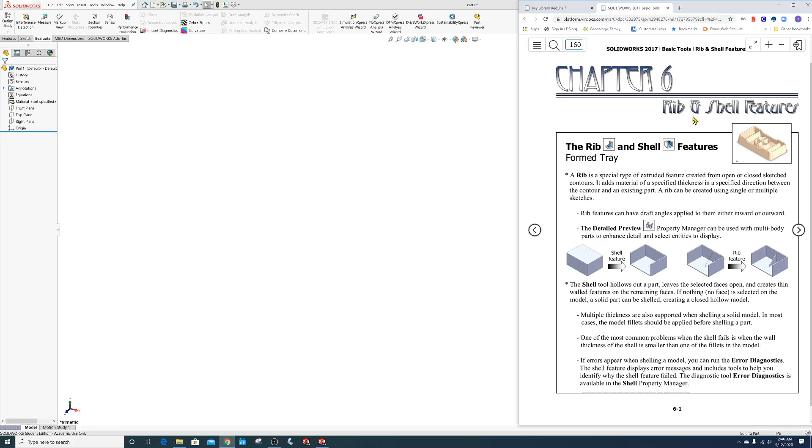So anyhow, let's get started. This particular one is... actually, no, that's not it. Just stay with me for a second. We'll get through rib and shell features, we've already done that one. Here we go, shell and mirror features is the actual one we're working on. Let's get started on that.

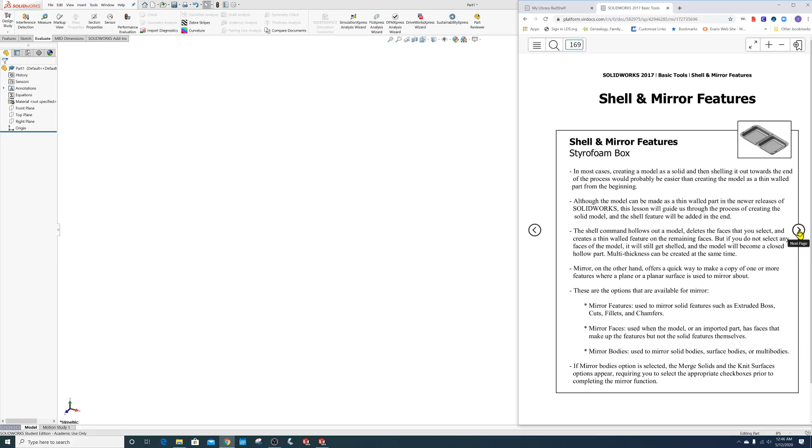We're going to make basically what's a styrofoam tray. I told you guys in the exercise to go ahead and use steel because I didn't want to confuse you guys, since I didn't think you could find styrofoam on the list. It's polystyrene, called PS something or another. Rather than confuse you guys when we're not in the classroom, I decided to let you make this in steel. So that's what we'll do.

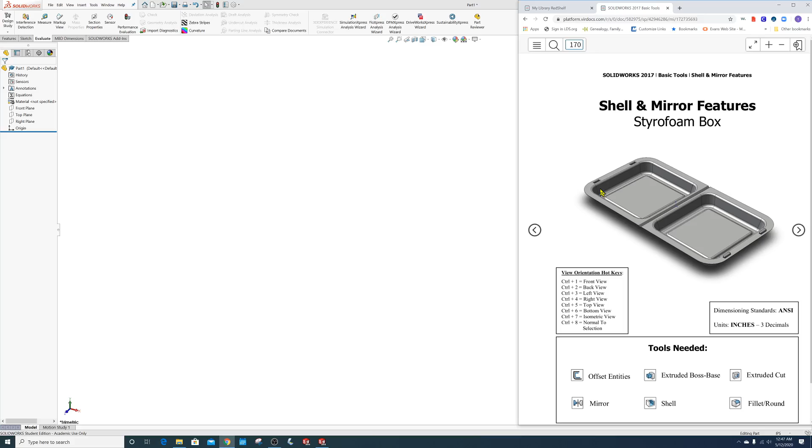But let's get started. We're going to start off by drawing a rectangle, and notice that the rectangle does not start on the origin. I always notice that kind of stuff. I also notice that we default to inches, but we need to have our decimal places set for 3. I'm going to check that really quick and make sure I'm set for 3 decimal places, and I am. So we're good to go.

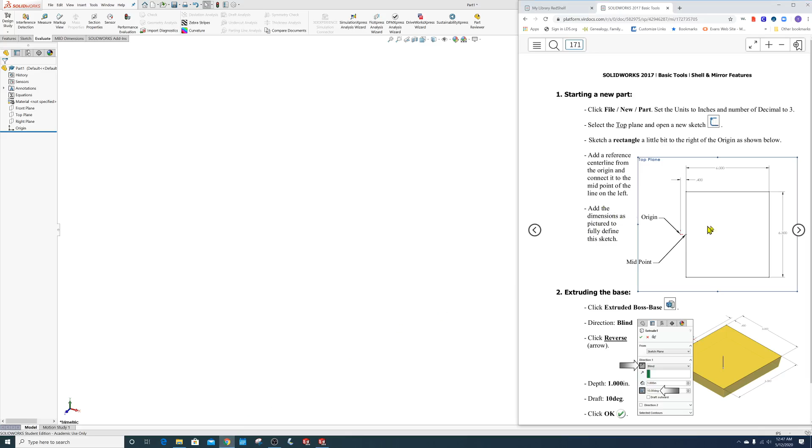I'm going to draw my rectangle at 6 by 6.30. I'm going to go on the top plane, start a new sketch, and then go ahead and do my rectangle. We got that, so we just need to add some dimensions. Let's take a look and see what those dimensions are supposed to be.

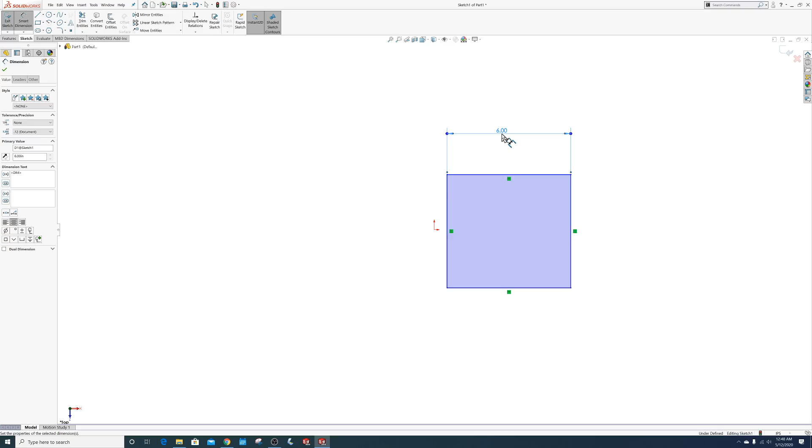6 across the top and 6.3 on the right. So I'll make that 6, and I'll make this 6.3. Then it has us do a dimension right here, so let's take a look — that's supposed to be 0.4. You can see there's a little short center line there that we're going to put in, and we see that this has to be collinear with the midpoint, so we'll do that as well.

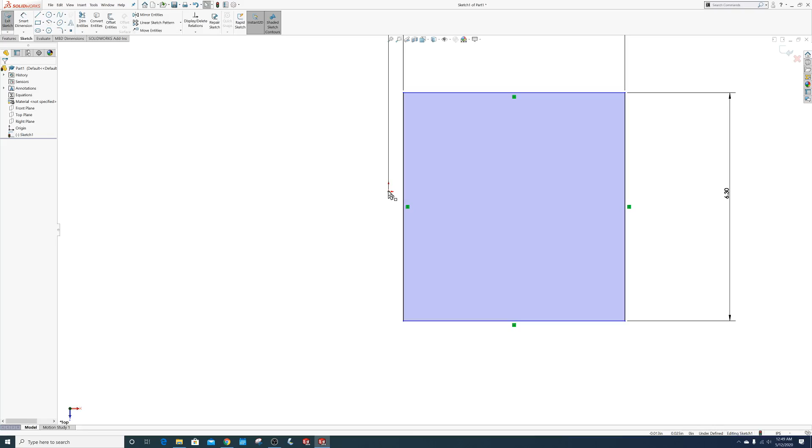So I'm going to go from here to here, and we're going to make that 0.4. Then I'm going to zoom in here and hit escape to get my arrow back. I'll click on that, hold down control, and find the midpoint — there it is, click there. And I'm going to make those horizontal. So now that is lined up.

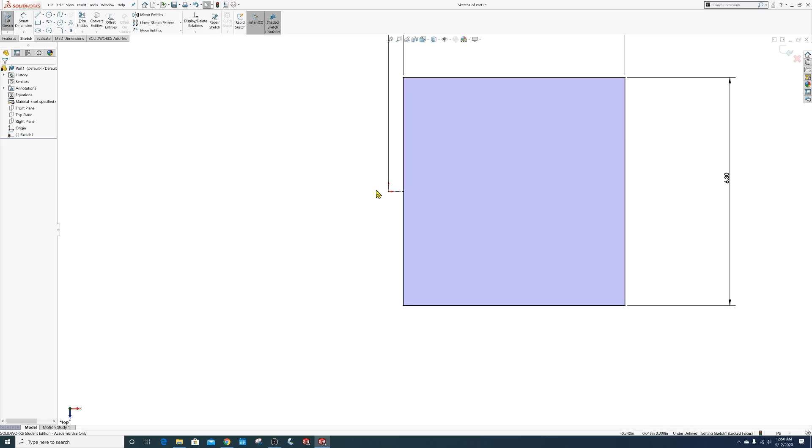And I am going to put a little center line there. I'm not quite sure why yet, but since it says to do it, I'm going to do it. So I've got my little center line there, and I'm going to turn off my features right now so they're not in the way. Okay, so we got that. Let's go back and see how thick we need to extrude this.

So we're going to extrude the base. Let's take a look here. We're going to extrude it, and we are also going to put what's called a draft.

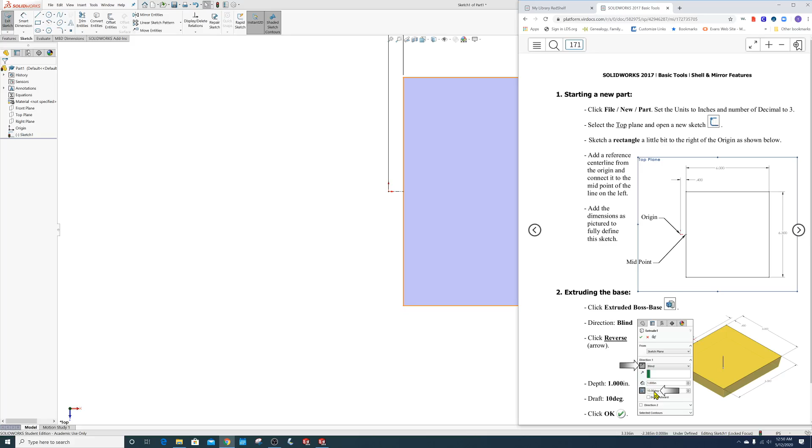We want to choose reverse so this extrudes down. The draft is going to be 10 degrees. So we'll go to features, extrude boss base, and notice it wants to come up. We want to reverse that, make it go down. We're going to click our draft, and then make that 10 degrees.

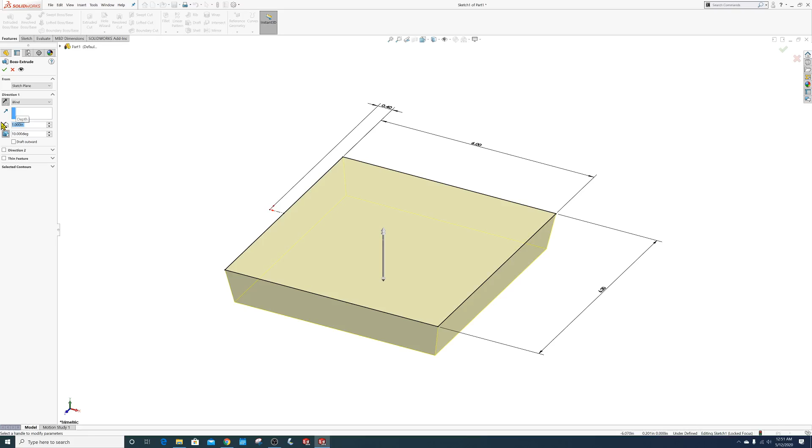See how that makes that kind of slope in? And I forgot how deep that's supposed to be, so let's check. We're going to do it 1 inch. I'll click right here, type in 1, and there we are.

So you can see how, if I do it like this, that draft made it slope in. They do that in engineering. If something's going to be injection molded and you want it to fall out of the mold easily, putting a little draft on it helps that a lot.

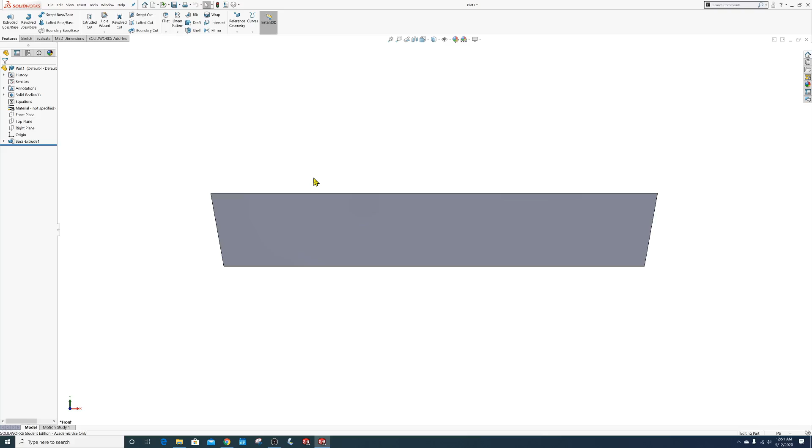So we'll get it back to where we are here and we'll go on to the next page. We're going to add some big 0.75 fillets, 4 of them. So let's go to fillet, and they are 0.75.

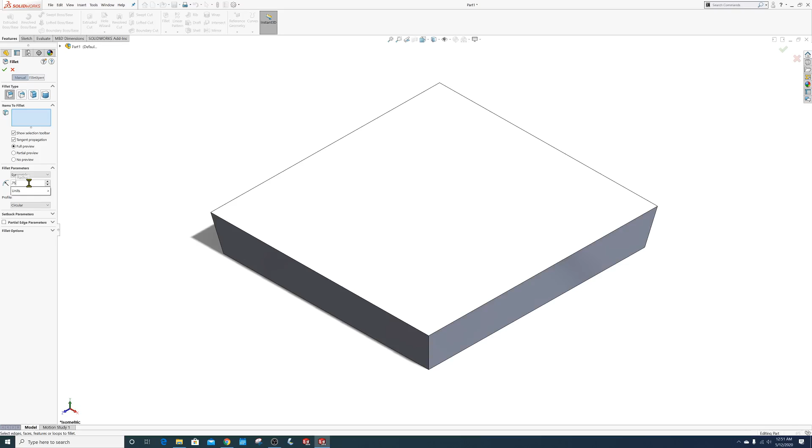I'm going to fillet here, here, and here. So there's our 0.75 fillets. Let's go back and take a look.

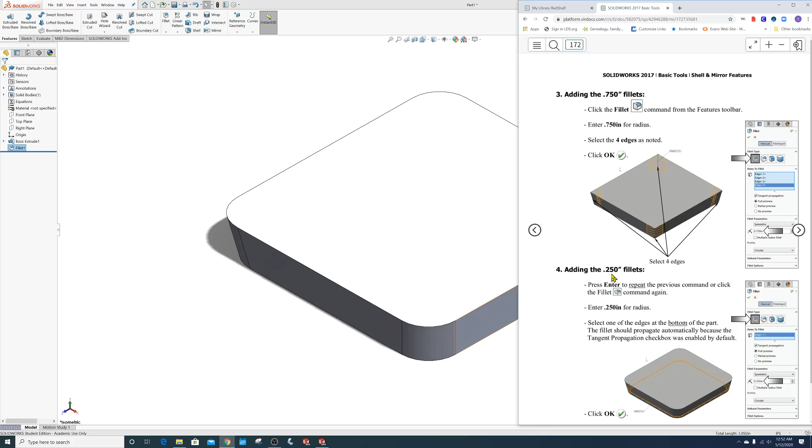And it looks like we have a fillet here on the bottom, and that's going to be a 0.25 fillet. So we'll go back here, go fillet, 0.25, and it's going to be right along the bottom. So there's going to be a bunch of clicking. Oh, it went all the way around because we had tangent propagation on. So we're good, we got that kind of rounded out like we're supposed to.

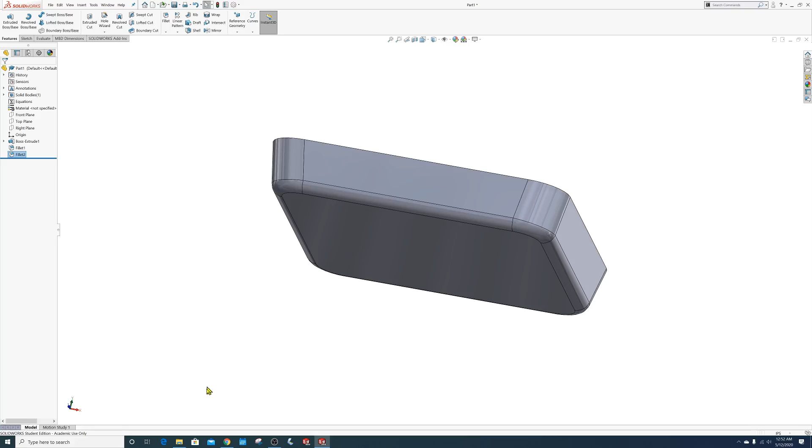So let's see what we do next, we'll go to the next page. Now we're going to do an offset sketch. So we're going to create a new sketch on the bottom. Let's click the bottom, new sketch, and then I'll just go ahead and make it normal. So we're looking at that.

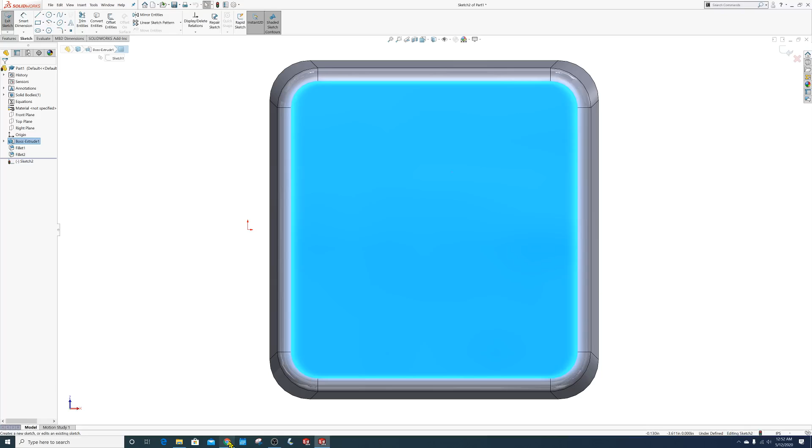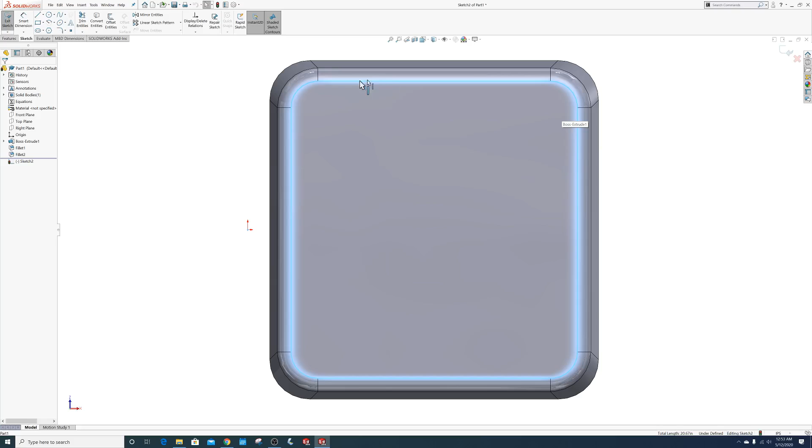Right click on one of the edges and select tangency. It looks like it's talking about right there. So I'm going to right click and select tangency, and that selected all of those. We could have held down control and selected them all one by one, but select tangency really made it faster for us.

The next thing we're going to do is select offset entities, and that did do an offset. But it looks like we want it to offset to the inside, so we're going to click reverse. It looks like our offset needs to be 0.4, so we'll click reverse and make that 0.4.

Let's see if there's anything else we need to do before we finish this up. So we did that, we got the reverse. Now we're going to extrude cut, go to a depth of 0.2, have a 10-degree draft, and clear the draft outward checkbox.

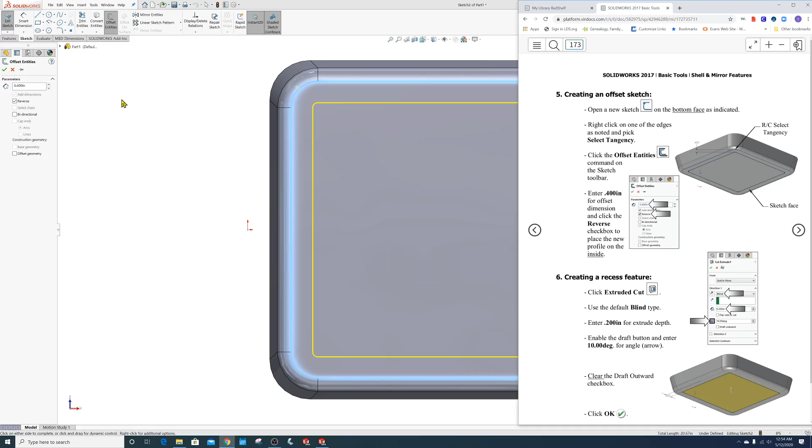So 0.2 is how deep we're going to go. We're going to go right here and finish the offset. Now go to features, extrude cut, and we want it to go .2, and let's check.

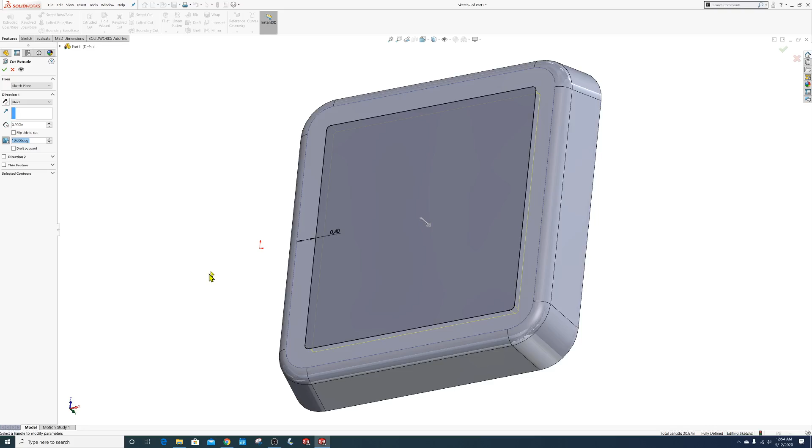So we're going to enable the draft again, it's going to be 10 degrees. The question is, which direction does it draft? Let's take a look. Well, we don't want the draft outward, so the draft outward is cleared. So we're good.

So we've got that little thing cut out there. Let's go to the next page. Looks like we have some 0.125 fillets. So we're going to go fillet. Was that 0.125? Yes.

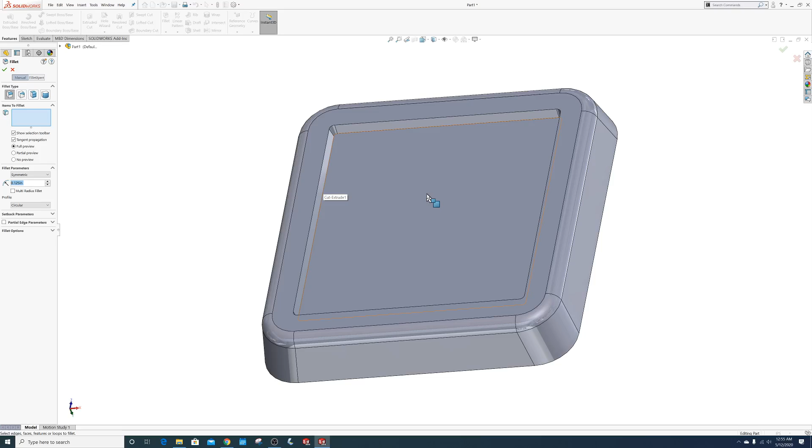0.125. Now it wants us to fillet all on the bottom here, and I could select all that one at a time, but if I select this surface, it automatically selects all of them. That's just a little trick you need to know. I think it says that in the book if you followed that right. So you can always just select the line, but if you select the surface, it's going to select all the edges that touch that surface. So we got that done.

Let's go here to the next one. Then we're going to go a 0.2 fillet, and that's going to be around the outside there. So we're going to go fillet, and it's going to be 0.2, and I'm going to select that right there. Tangent propagation's on, it goes all the way around, and there we are.

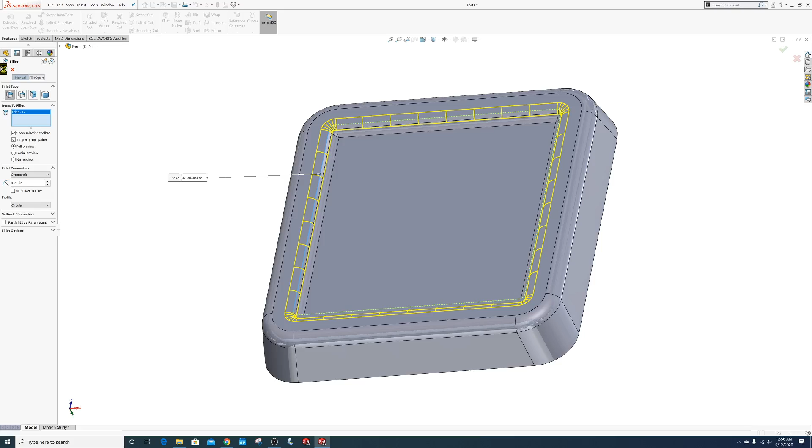Next page. Just checking real quick, make sure we're not missing anything.

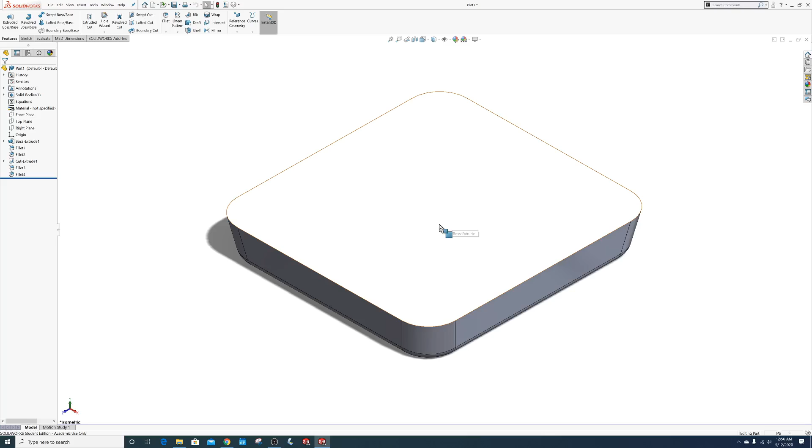Okay, we want to create the rim feature. So select the upper face of the part. Let's start by doing that. I'm going to turn this back to an isometric view, selecting the upper face of the part and starting a sketch.

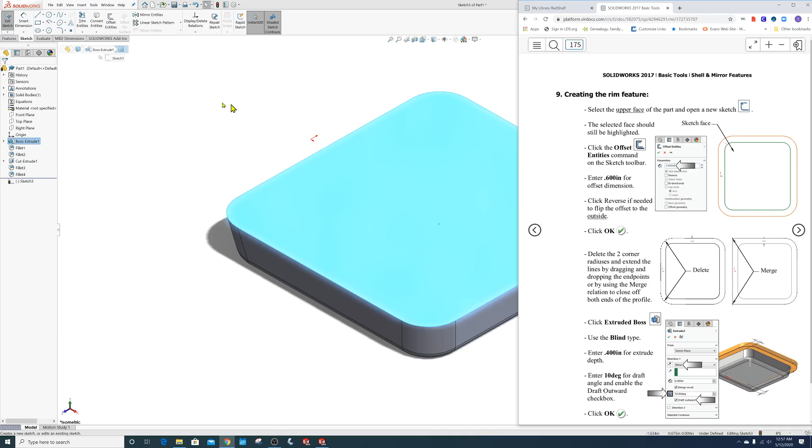It is highlighted. We're going to do offset entities, and 0.6 for the offset dimension. So offset entities and 0.6 is what we want. Let's make sure we're where we want to be here.

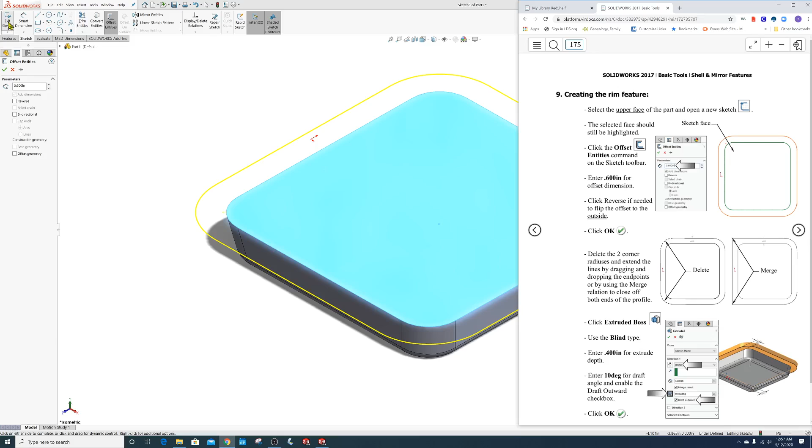We definitely want it to be right there. It says click reverse if needed. We don't need that, so we're good there. So we're good here.

I'm going to click normal to again, so we're looking at this correctly. Now we're going to go back to this, and it says to delete these two curves and drag the edges together, but we're going to leave it curved on the other end. So let's go ahead and do that.

I'm going to delete that curve. I'm going to delete that curve. I'm going to take this point here and drag it until it lines up right there. And then drag them till they're coincident. I'll drag this one down until it lines up just like that.

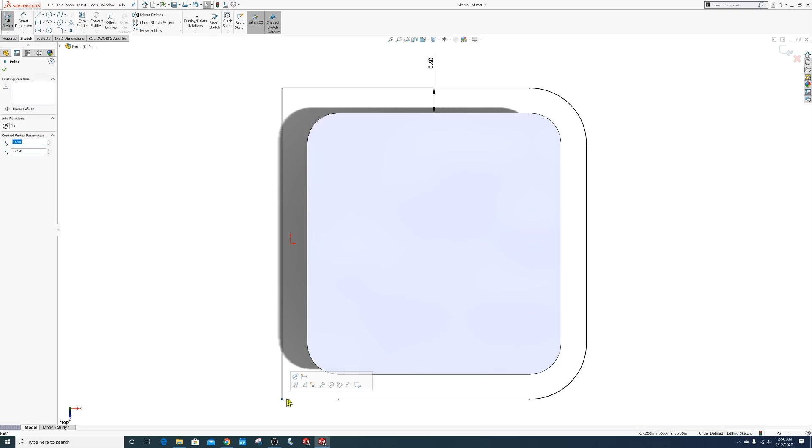Okay, we're still good, we're fully defined. Now it says we're going to click the Extrude Boss Base. Using the blind, we're going to enter 0.4 and draft it 10 degrees. And it looks like we want this to extrude up.

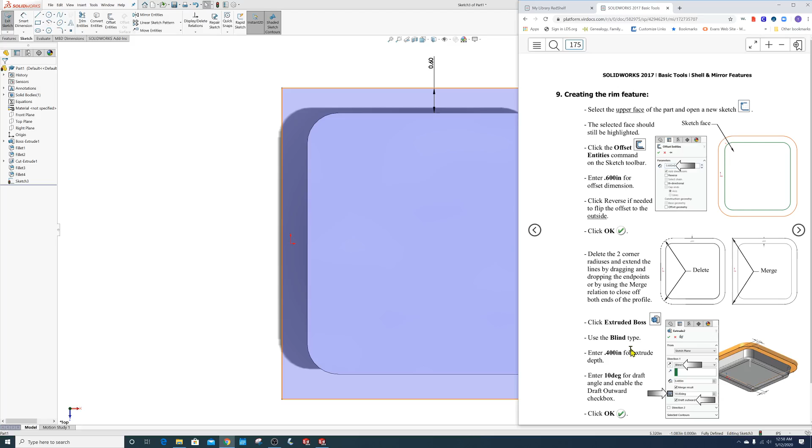So we're going to go to Features, Extrude Boss Base, 0.4, and that's looking good, it's extruding up. We want it to draft. And I don't remember...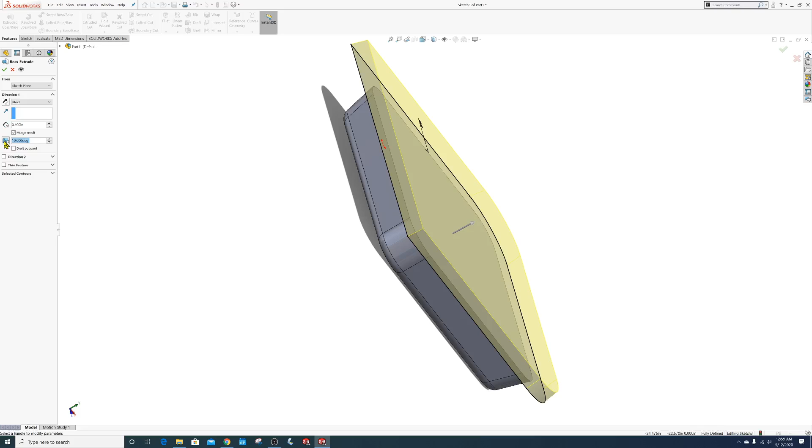10 degrees, we want it to draft outward. See, it's going inward right now, so I'm going to choose draft outward. And we're good to go.

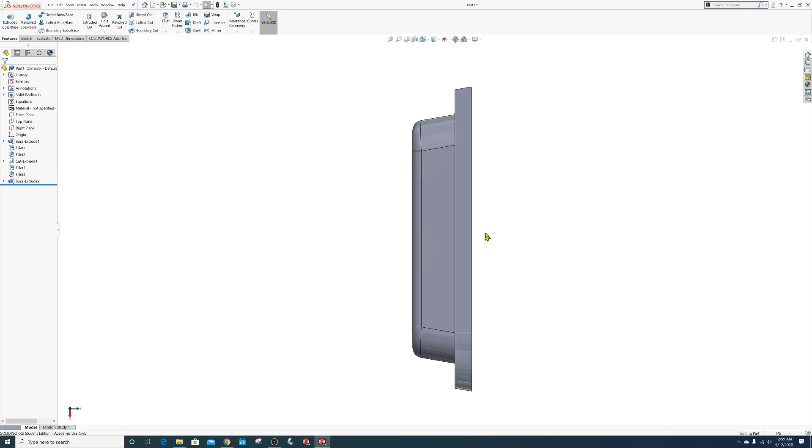Actually, what I want to do is this. So let's go to the next page.

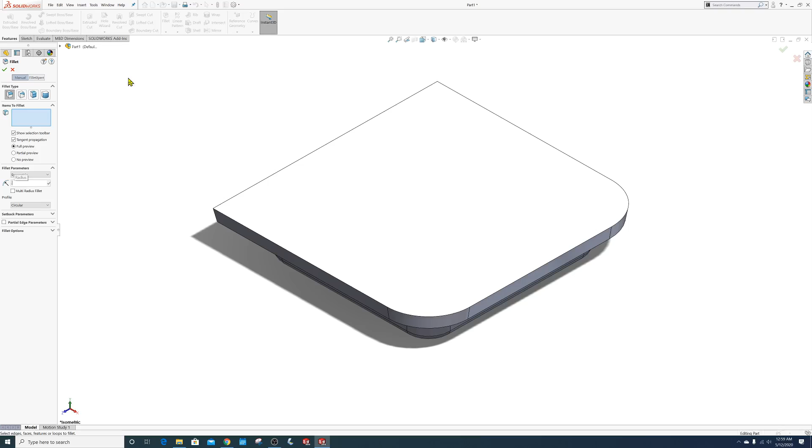Okay, we're going to add another 0.125 fillet, and you can see it goes right around there. So we're going to go fillet, 0.125, and it looks like we need to do it right around there.

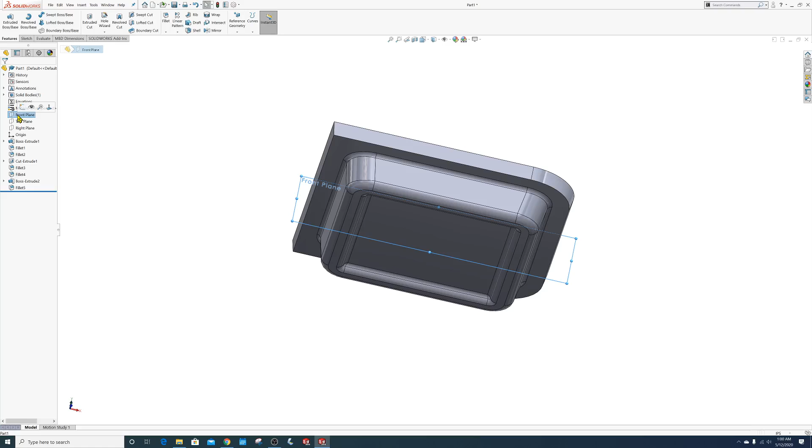So let's go, all right. So now we want to create the fold feature. Select the front plane, open a new sketch. So front plane, sketch, that's a sketch plane right dead in the middle there. No problem with that. I'm going to go Normal To.

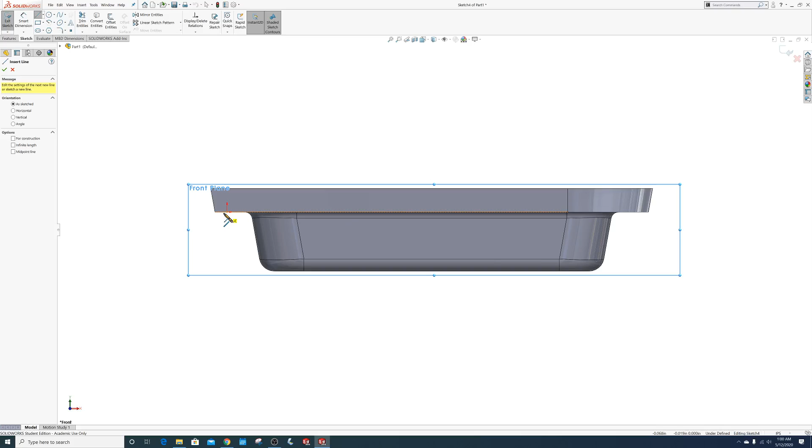And so now we want to draw a triangle which starts right there at the origin. So let's do that, and you guys know I don't really worry about dimensions at first. I'm just going to draw the triangle, coincident with there, go across there. So we've got our triangle now.

So now we're going to look at our dimensions. Looks like we want a 45-degree angle and a 0.118. So I'm going to go to dimension, and we're going to go 45 degrees.

Now you guys who didn't watch, I actually selected that line and that line, and then just 0.118. So I'm going from there to there and come straight down 0.118. And you can see we've got it there, and it is fully defined now.

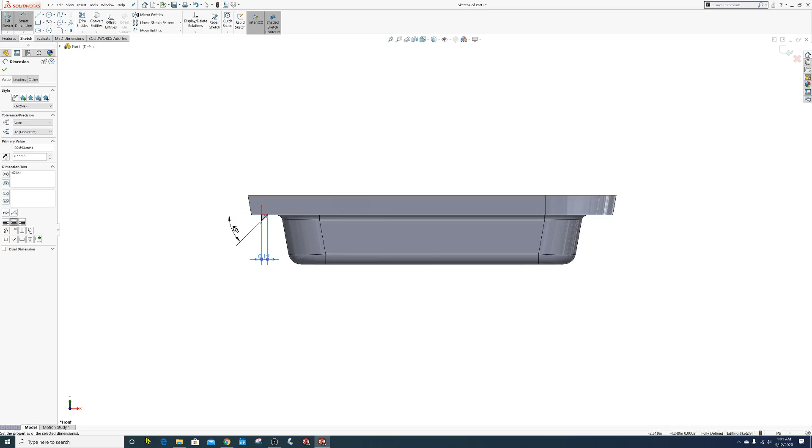So let's see what we need to do. We need to... let's go to the next page.

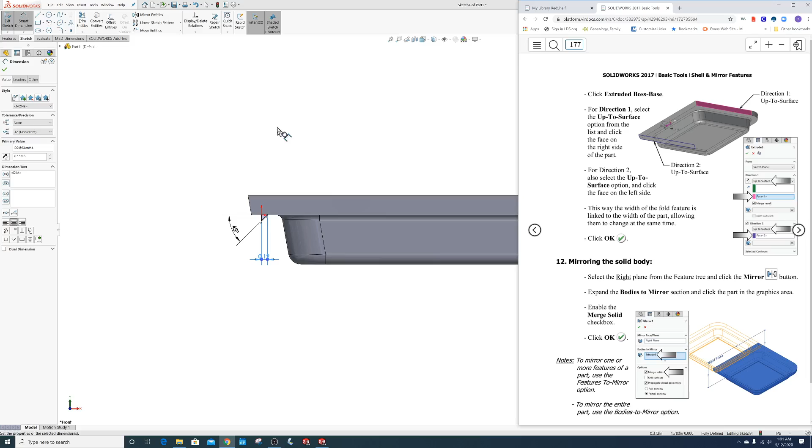So click Extruded Boss-Base for direction 1 up to surface, direction 2 up to surface. So we're going to go Extrude Boss Base, and we're going to select up to surface for direction 1. And that's the surface we want to choose.

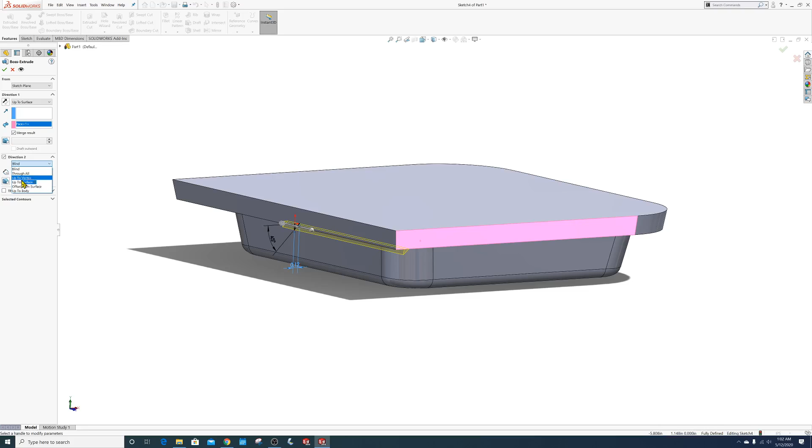And then for direction 2, we're going to choose up to surface and choose that one, that plane. And the interesting thing now that I've extruded that, you can see that since I chose up to that sloped surface, it actually follows that slope on both sides. So we're good.

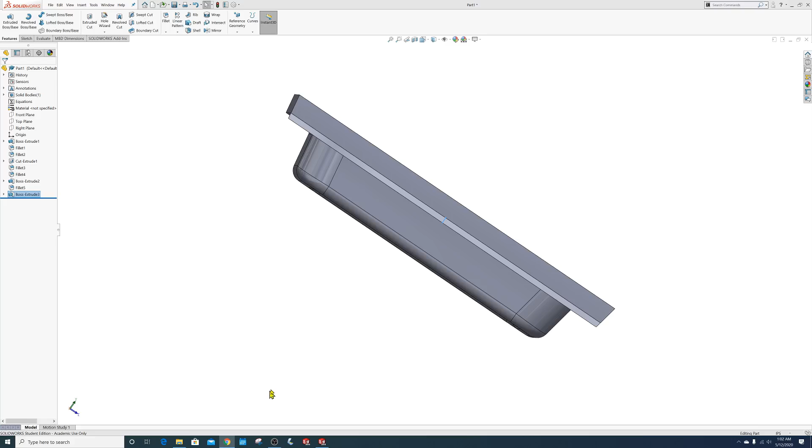All right, so we've got that. Now we want to mirror the solid body. Select the right plane from the feature tree and select the mirror button. So the right plane, and then we're going to select the mirror button. There it is.

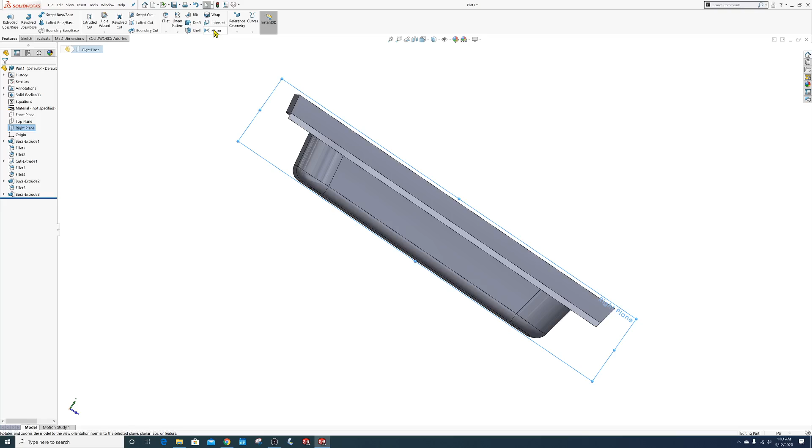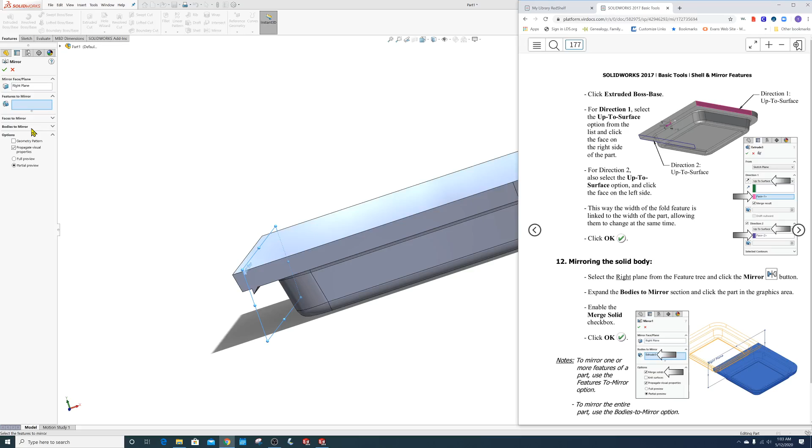You can see that the right plane is already selected as the mirror face. Now it says expand the bodies to mirror. You can choose features to mirror, but we're going to choose bodies to mirror. I can just choose anything over here because it's going to choose this entire body, and you can see that it automatically mirrors that. So we've got this whole thing mirrored out now. I can go isometric so you can see it all nice and the way it's supposed to be.

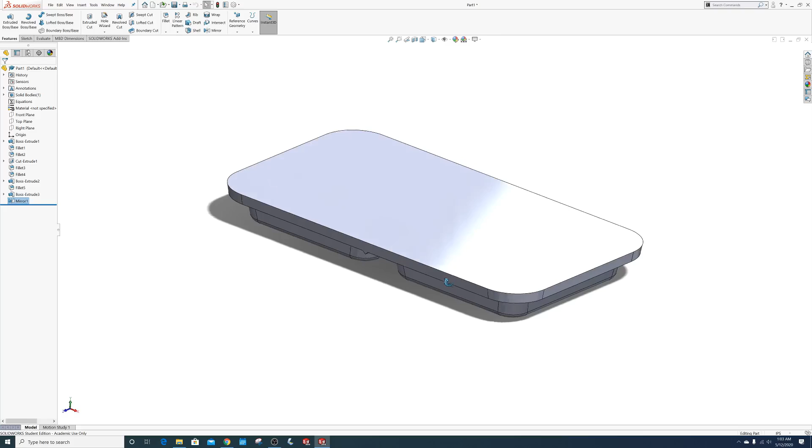Okay, so let's go on. So I chose that. It says notes to mirror one or more features of a part, use the features to mirror. To mirror the entire part, use the bodies to mirror option. So that's what we did.

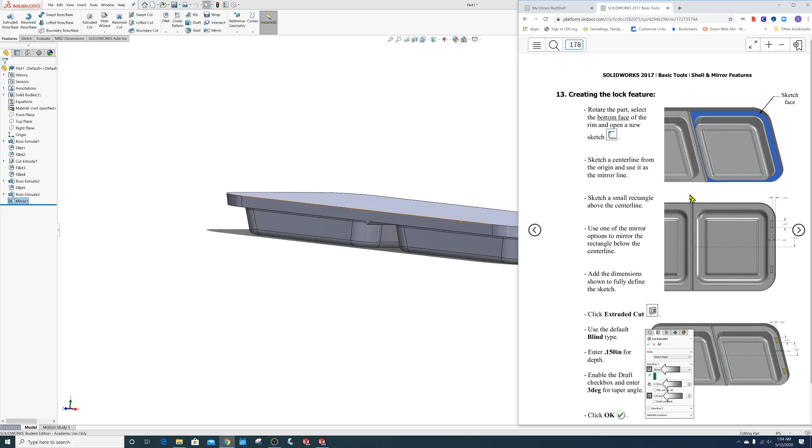Next we're going to create the lock feature. It wants us to go ahead, and I think it'd be easier if I actually make this smaller so we can see what we're supposed to do. So I'm going to select this face right here, start a sketch. I'm going to go normal to it.

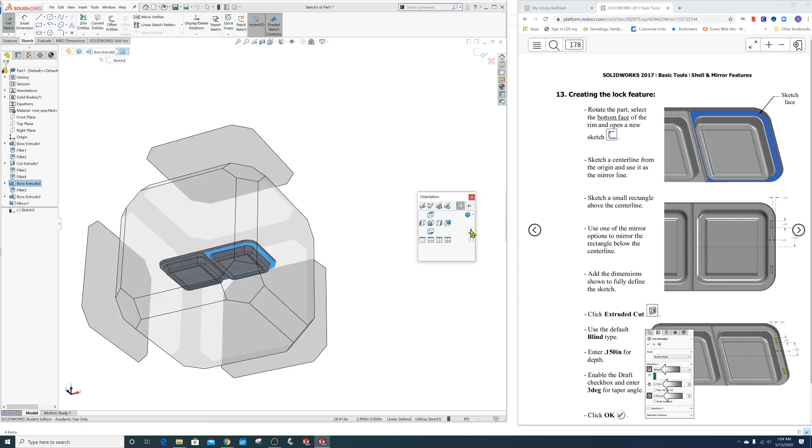Now it says sketch a center line from the origin and use it as the mirror line. So I'm going to select the center line from the origin, and we are going to use that as a mirror line. I just want to make sure that it's horizontal, and it is. All right.

So sketch a small rectangle above the center line. I'm going to my rectangle command and do a small rectangle. Then use one of the mirror options to mirror the rectangle to below the center line. So I can just go mirror entities and mirror about. And there it is. Because it's mirrored, it's automatically going to be symmetrical.

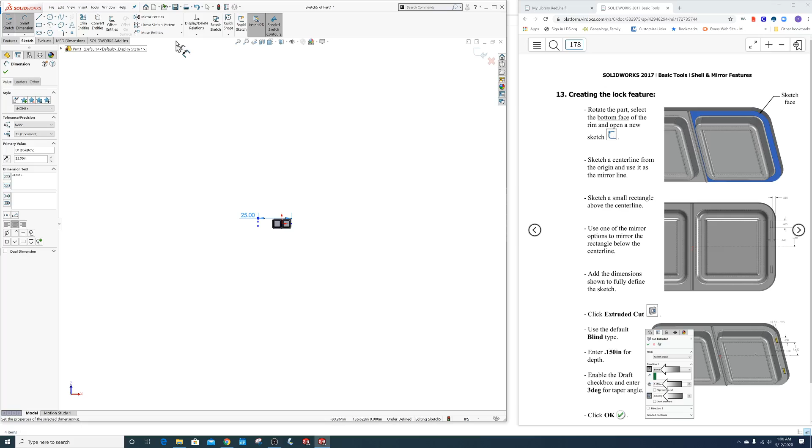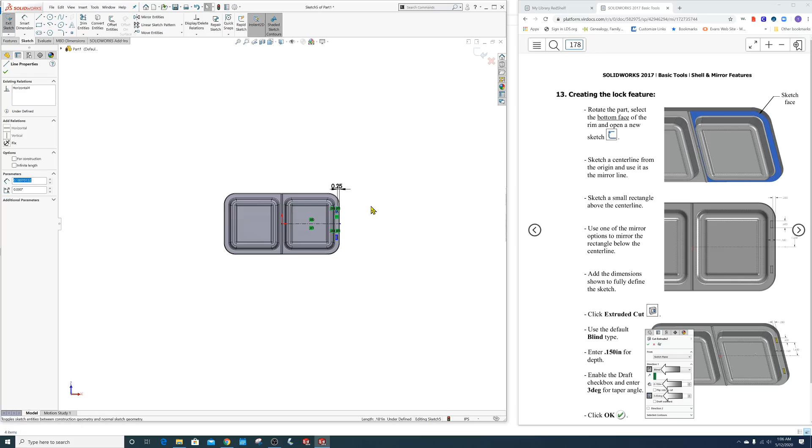Obviously I missed my decimal, so let's just undo that. See, it says 25 instead of 0.25. So let's try that again. 0.25, a little bit better. Then from here to here is 0.6. I'll go from there to there. Actually, it would be good if I get into dimension mode first and then go there. And that's 0.6. Then the bottom here, from here to the center line, is supposed to be 1.65.

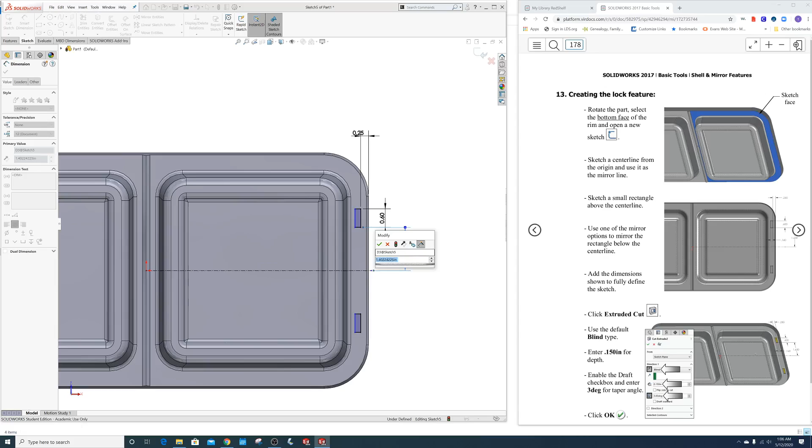So we're good there. And the overall thickness right here is going to be 0.16. You can see they're all there, they're all black now. I am fully defined.

So I'm going to go to extrude cut. I'm going to enter 0.15 for the depth. So extrude cut, 0.15 is the depth. And we're going to enable a 3-degree draft. So draft, and we're going to change that to 3. So we're good.

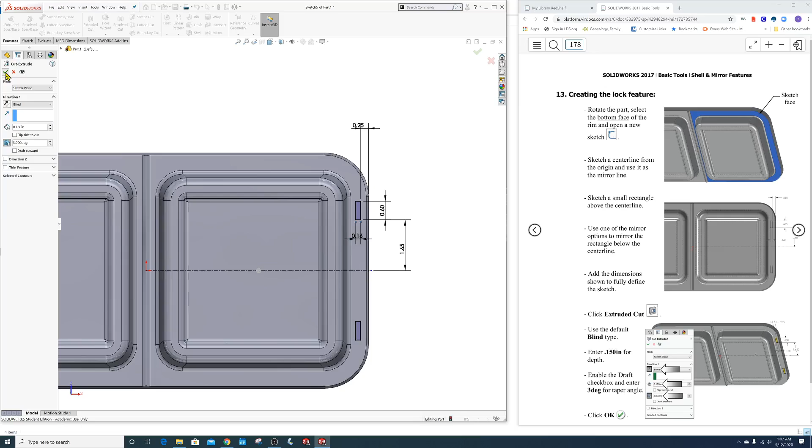And if you kind of zoom in there and I revolve this, you can see that it did do what it was supposed to do. So let's go to the next page.

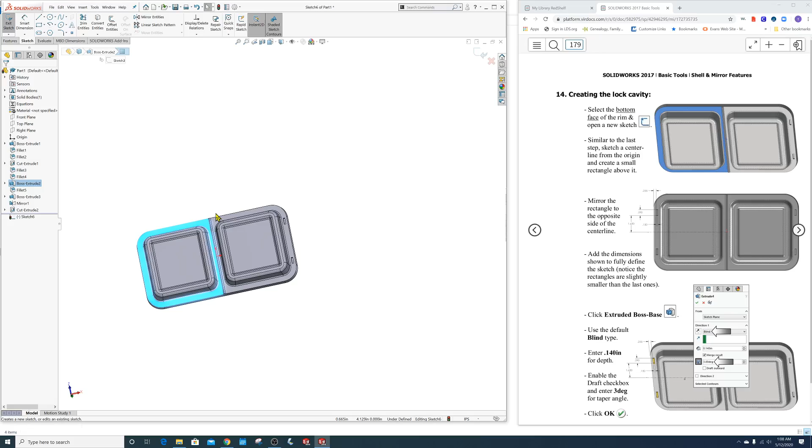Now we're going to create the lock cavity. So now we're going to select over here and start a sketch. I am going to go normal to it. And of course we're going to do a center line again, similar to last time. So starting right here at the origin, just a horizontal line. There's my little thing that says it's horizontal. So I got that.

And it says draw another little rectangle. And then we're going to mirror it about this line right here. So we're good there.

And then we're going to add the dimensions. So again, that's 0.255. I'm going to go from there to the outside there, 0.255.

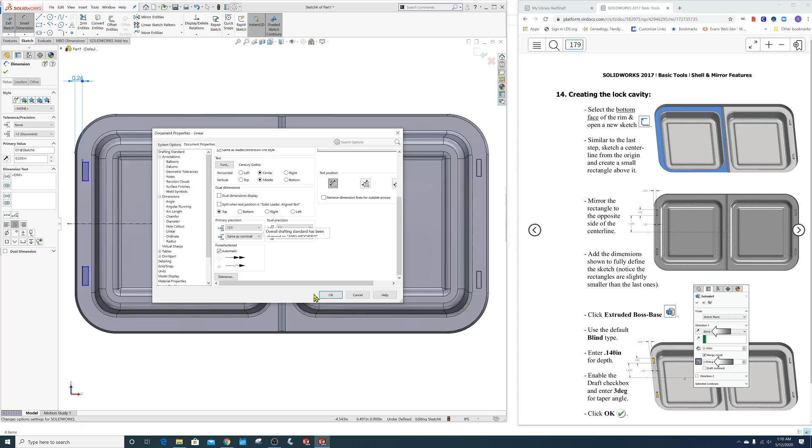Even though I had 3 decimal places selected, it's only giving me 2 here. I can fix that. I go in here, and then I'm going to go to units, and that is all 3. So let's go to document properties, and let's go to dimensions, linear, and for some reason that did not change, so I'll change that to 3, and now we have 3 decimal places like we're supposed to.

And then this is going to be 1.65 from there, 1.65, 0.59 from there to there, 0.59, so we got that. And then from here to here, 0.15.

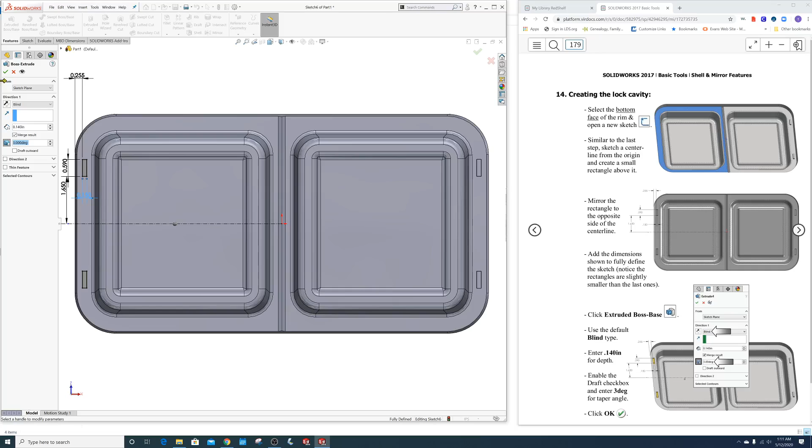That looks like we're all fully defined. So we're going to extrude boss base, and we're going to go 0.14. And we're going to select the draft, 3 degrees. And you see that time, instead of going in, we actually came out. We do have a little bit of a 3-degree draft, so we're good there.

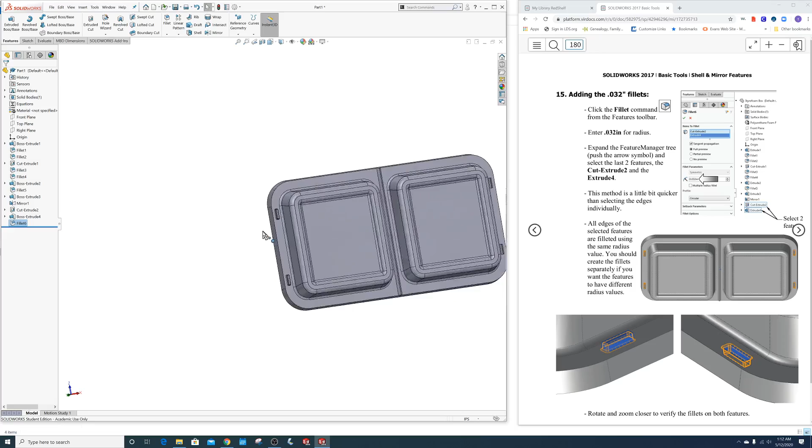We're going to go fillet, and then here to the features, and we want it to be 0.032. Let's check that feature and that feature, and notice that it automatically did it. We could have gone here and just selected all these edges one by one, but choosing the feature made it so they all did it like they were supposed to.

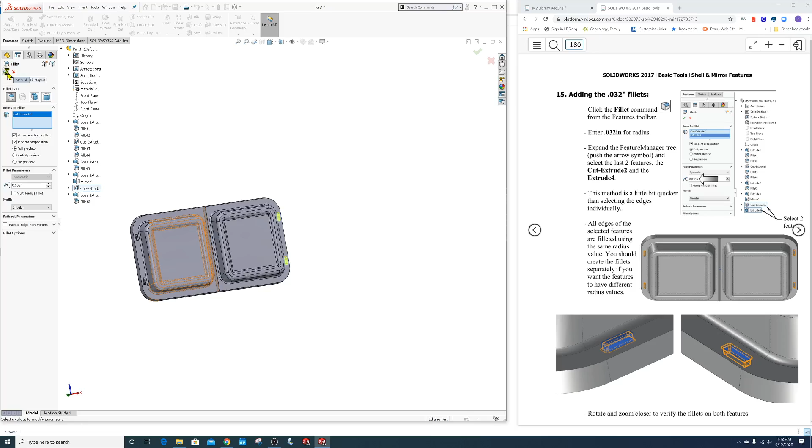And you can see, oh, so that didn't work. Let's do it again. Fillet 0.032. There's our cut extrude. It worked that time. I'm not quite sure why I had to do that twice, but if it happens to you guys, just do it twice. So you can see those are all filleted now like they're supposed to be.

All right, next page, shelling the part. The shell command hollows a solid model, deletes the faces you select, and creates thin wall features on the remaining faces. During the shell mode, if you do not select any face of the model, the part will still be shelled, creating a closed hollow model. The first selection box is used to specify the faces of the model to remove. The second selection box is used to specify different wall thicknesses.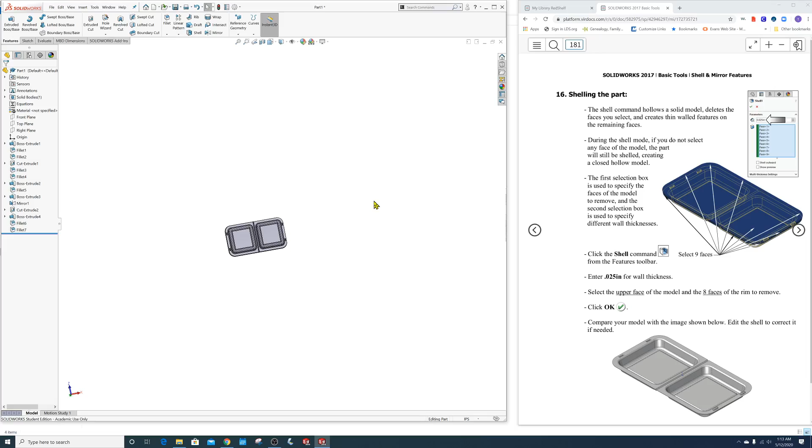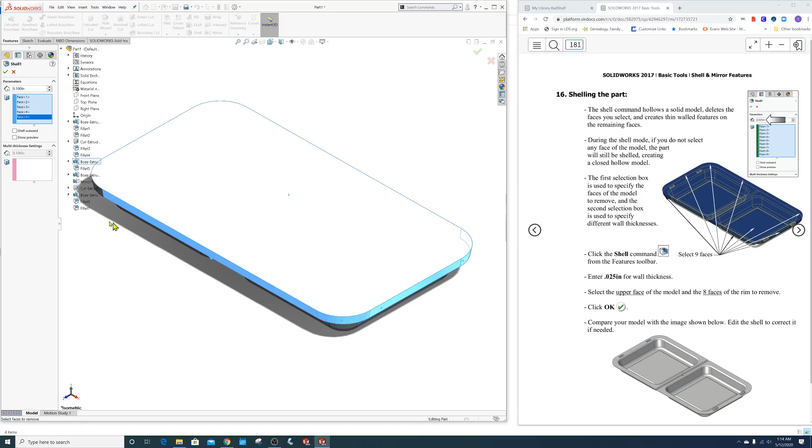So we're going to go back to isometric, and now I'm going to click on the shell button. It says to select 9 faces. So y'all watch, these are the 9: 1, 2, 3, 4, 5, 6, 7, 8. So there's my 9 faces that I selected.

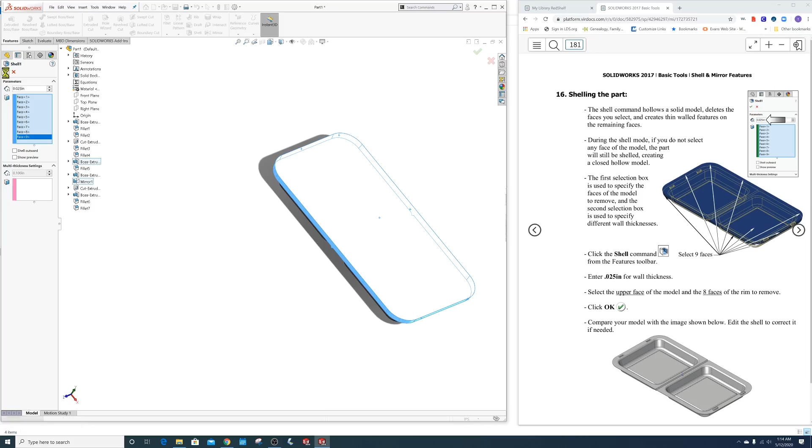And then the shell distance is going to be 0.025 - shell distance I should say, not diameter. I'll click this, and you can see that it hollowed this out, so now it looks just like a styrofoam tray.

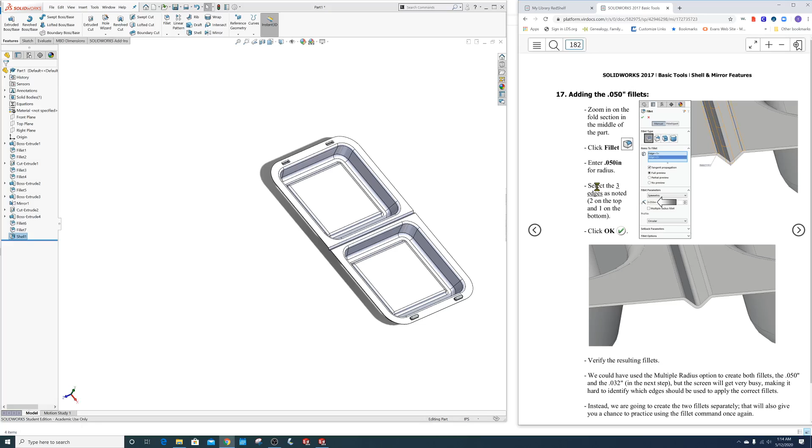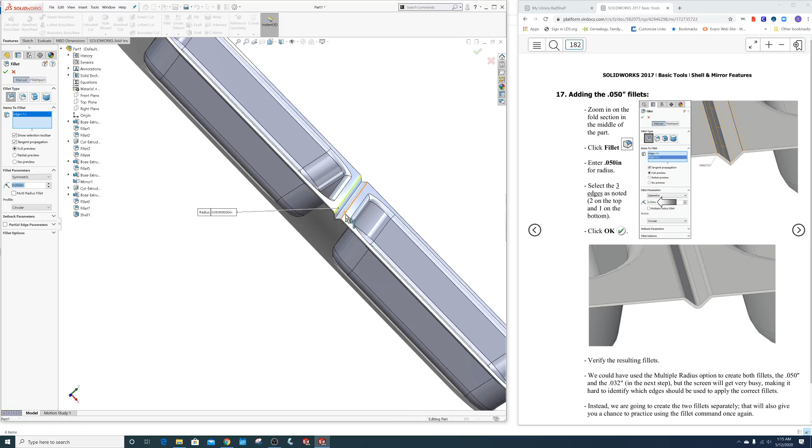Now there's a few more fillets it's going to want us to do. It says adding the 0.050 fillets, zoom in on the fold middle part, fillet 0.050, select the 3 edges as shown. Now these are going to be the bigger ones, so we're going to select the 3 edges as shown. So we're going to go to fillet, 0.050, enter, and I'm going to select that one right there, that one right there, that one right there. Got that done.

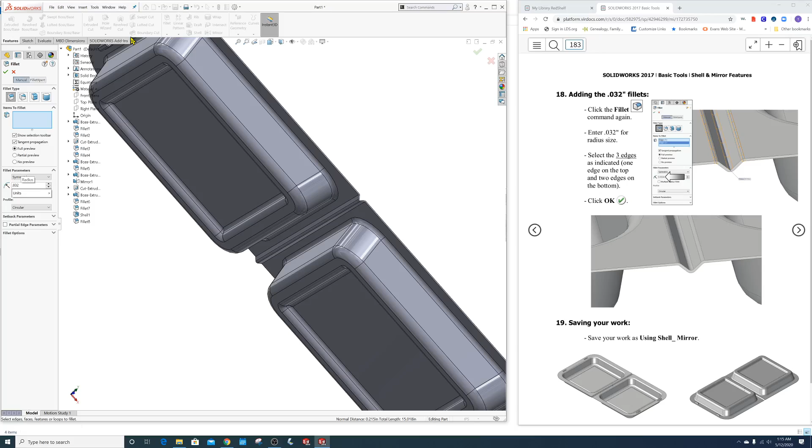Going to go to the next page. Now we're going to have some 0.032, so we're going to go fillet, 0.032. Now we're going to go to the little inside ridge: one right there, one right there, and one right there. So we got all those things nice, and see how that makes it.

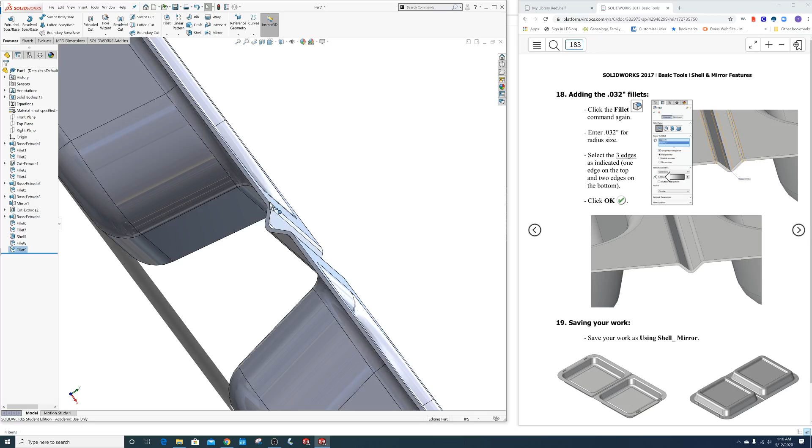Now you can see why that one had to be the big one, that one had to be the small one. Can you see that? If I'd have done a small one there and a big one there and a small one there, it would not have maintained the same thickness going through. So you got to be careful there. So there we are.

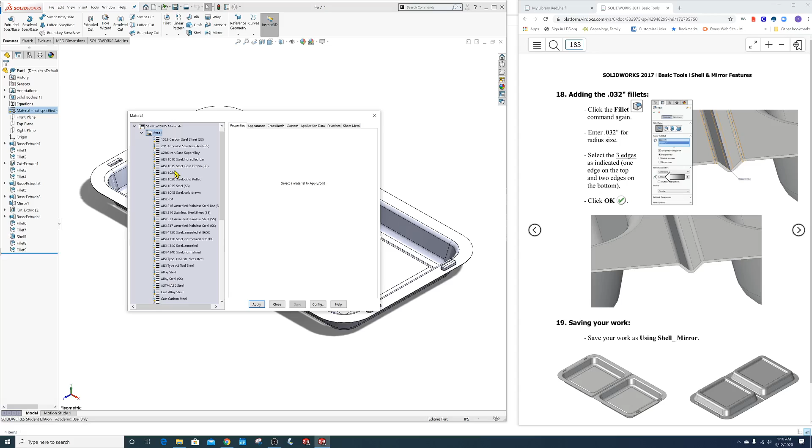Save your work using Shell Mirror. So that's what you're going to save it as. I've already got this saved, so I'm not going to save it again. But you guys, to get your mass properties, are going to go right here to your material, edit material, and we're just going to go ahead and choose 1020 steel, even though we know this would never be made out of steel. And then we'll go to evaluate, mass properties, and just make sure that I can see the mass properties. It's just over 1 pound, 1.003 pounds. I know that is right because I've done it many times.